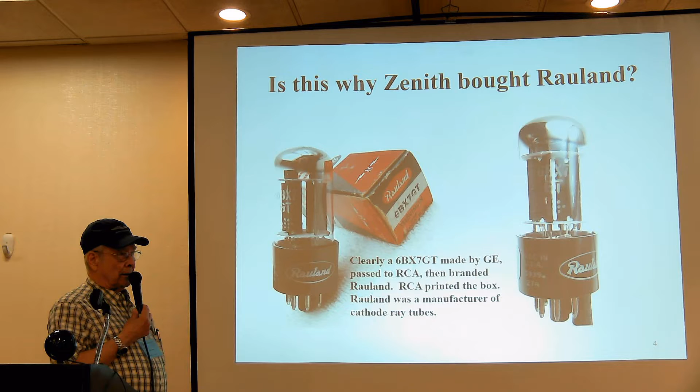So how all this comes down is very interesting, but Rauland was a producer of picture tubes, and I'm not sure they ever made a receiving vacuum tube, and it's very unusual to see a Rauland box tube. So anyway, go ahead. He said they were accused of doing that to prevent losing vacuum tube supply. He did not say in the write-up whether or not it was true. Go ahead, next one.

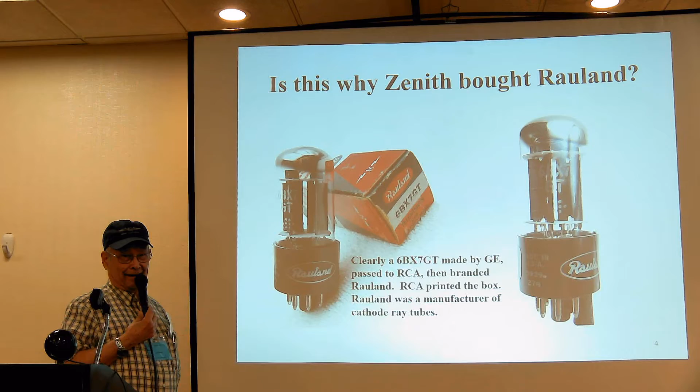So, RCA's lucrative patent licensing scheme was facing destruction. RCA and others provided technical support and advice on organization of the Japanese electronics industry in return for paying to license the RCA patents. So, Sarnoff established a technical center in Tokyo modeled after the Princeton RCA laboratories.

The Ministry of International Trade and Industry in Japan organized a consumer electronics industry plus financing of about 10 companies, and you will know Mitsubishi, Toshiba, Hitachi, all the ones you know. They organized an industry to manufacture vacuum tubes using the Keiretsu organizational structure common in Japan. And that's another story in itself. But then they used predatory dumping practices to sell this equipment into the United States. Go ahead to the next one.

The Japanese action initially was hardly noticed in the US. Nobody was paying any attention to what they were doing over there. And from 1958 to 1965, by selling at reduced prices in the US, they reduced the US radio industry to a shambles. In the 1960s, color TV was exploding. Zenith was leading in production and customer acceptance. And Japan attacked the US color TV market. And the Sony Trinitron and all of that stuff is part of that story.

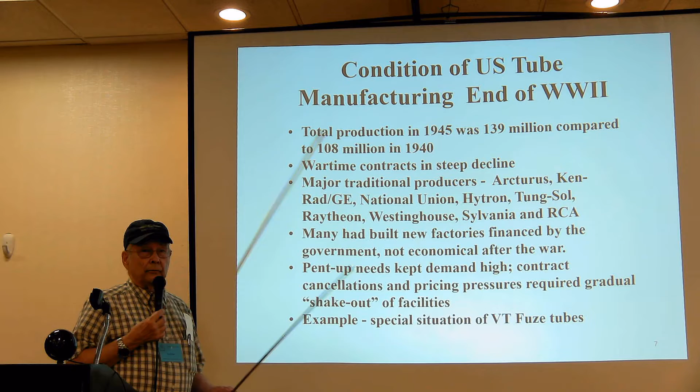Okay, so now I've gone through the first part. Now this was originally going to be about tubes. Now we'll talk about tubes and the manufacturing of them in the U.S. At the end of World War II, the total production in 1945 was 139 million tubes compared to 108 million in 1940. And the surprise of that is that you'd think World War II would have created more of a bump in that. But of course, the civilian demand went down and it was replaced by military.

After the war, of course, the wartime contracts went into steep decline. And these were the heydays, though, of the American telecommunications industry. Major traditional suppliers were Arcturus, Kenrad, GE, National Union, Hytron, Tung-Sol, Raytheon, Westinghouse, Sylvania, and RCA. And many had built new factories financed by the government, not economical after the war.

Lots of different industries in the U.S. went through that process where the company didn't have the money to build it, the government built it, or gave them the money to build it, or they leased it back to them to operate, and then after the war they would either buy it or sell it. So the pent-up demand after the war kept demand high. The contract cancellations and pricing pressures required a gradual shakeout of facilities.

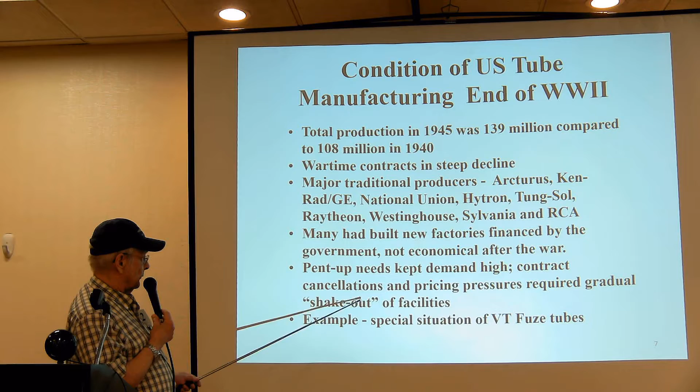An example of this is the special situation of the variable time fuse, which used the patented tubes developed by Sylvania and the Applied Physics Laboratory of Johns Hopkins. And everybody wonders why we don't see those tubes. When you fire a shell, the tube has got to last for 5 seconds. And those tubes had a maximum life of 5 hours. You could test them and see that they last that long. But this is not going to be a tube that's going to find wide recognition in the consumer electronics industry. Okay, next tube.

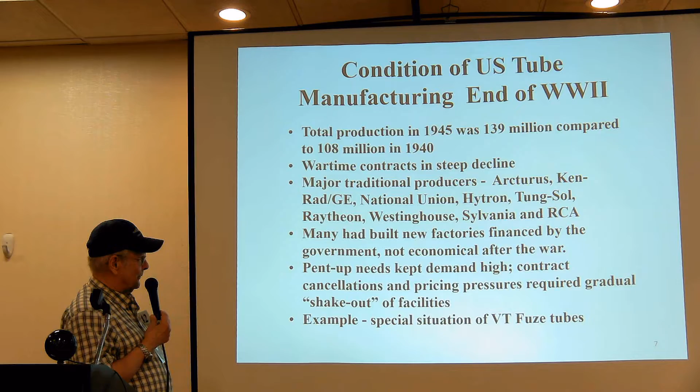Paul? Yes. Can you make sure your mic is turned on? I thought it was. Hello, 1, 2. Hold it closer. Sorry about that.

In 1974, Western Electric produced 1,200,000 tubes. And on December 31st, '83, by court order, the Bell system ceased to exist. That was an important milestone for me too, because I had gone to DC to the Telecommunications Association to work the divestiture from their perspective. The last manufacturing facility in Kansas City closed in 1988. The last tube produced was the magnificent 300B audio triode, and that is Bernie Major's quote. So I didn't say that, he did. But then he made them. Okay, next.

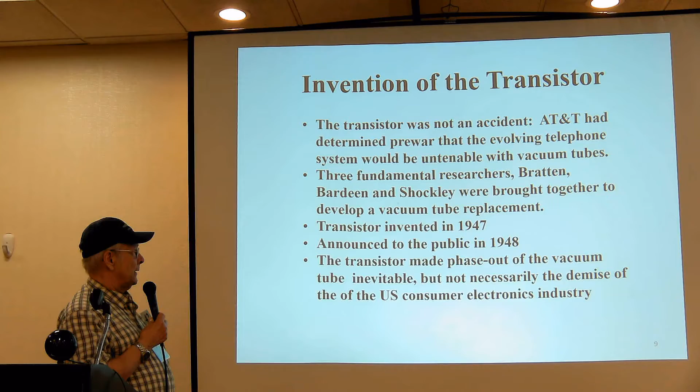These guys were all throughout Western Electric and Bell Labs during World War II, developing radar and detection systems and all that. The transistor was invented in 1947. It was announced to the public in '48. The transistor made the phase-out of the vacuum tube inevitable, but not necessarily the demise of the U.S. electronics industry. That might have happened anyway, but all the stuff that I was telling you about to start with triggered that into a real decline. Go ahead then, next one.

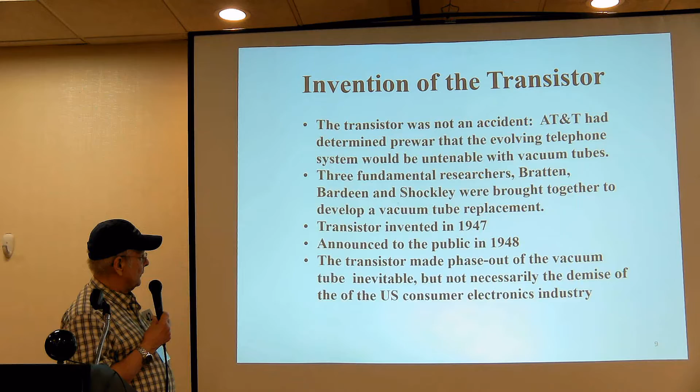And of course, by the time you get to '76 and '78, you're getting down to pretty small numbers. And I do not have any numbers past that. But these are pretty good, well-researched numbers. The researchers that got these were there during that time. Go ahead and do the next one.

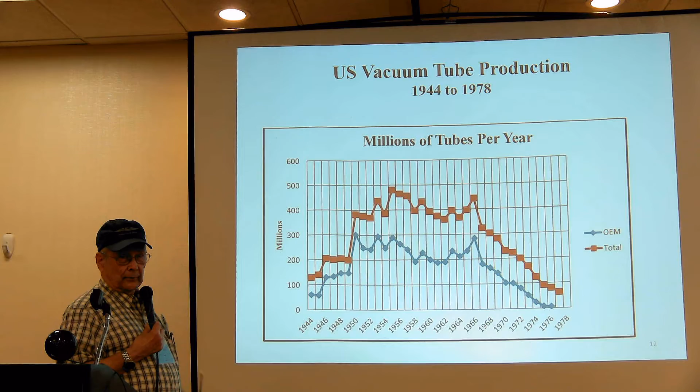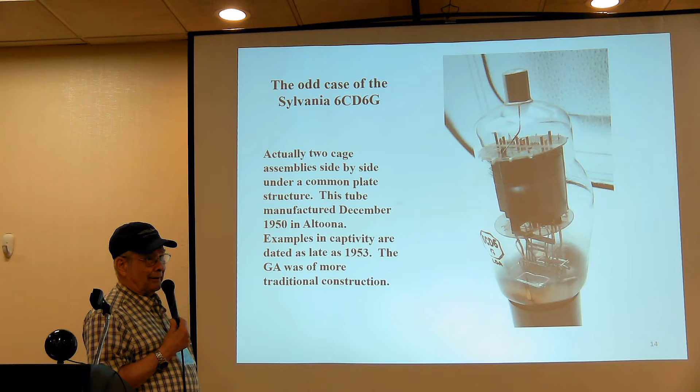This is a strange case of a 6CD6. This is a photograph that will give you an idea. It's actually two complete tubes, two cathodes, two sets of grids, all around one plate. Sylvania manufactured this thing from about 1950 to at least 1953. I've got a number of examples of this tube. I never realized it until I started sticking my nose in some of this stuff to do this. I had a bunch of these and didn't even realize it. Now, why they did it that way, I don't know, but that's just one of the curious things you find out in the evolution of the tube business. Go ahead.

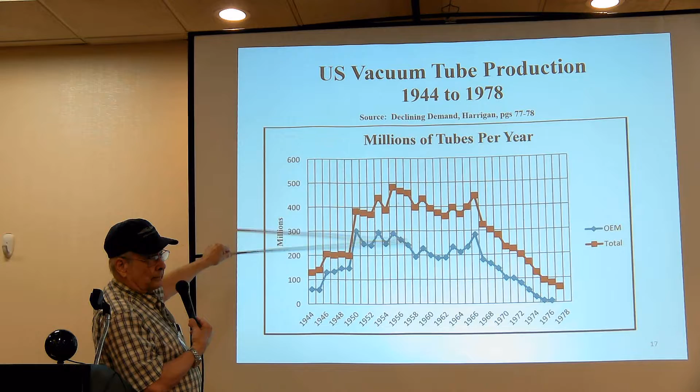Go ahead, next one. All right, now the manufacturers, after this, they could see the writing on the wall because already transistors were starting to make inroads. And I don't know how many of you guys were in engineering circles at the time. We'd sit around endlessly arguing about whether or not transistors would ever replace vacuum tubes. No, they're never going to be able to handle high power. No, they're never going to work at high frequency. And of course, we know where all that went.

1955 was the highest production year. By 1955, transistors had begun to be adopted where low power and reliability were essential, for issues where cost was not a major issue, and you know what all that means. Military and high reliability manufacturing stuff. Diverse views on when transistors would begin to replace tubes in consumer products. By 1966, solid state had not been commercialized as fast as many experts had expected.

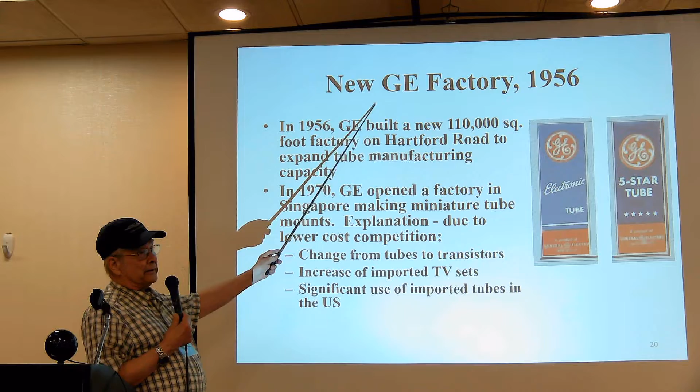GE built an entirely new factory in 1956, a 110,000 square foot factory on Hartford Road in Kentucky to expand tube manufacturing. In 1970, GE opened a factory in Singapore making miniature tube mounts.

The Japanese were already starting to make major inroads, and the GE explanation was change from tubes to transistors, increase of imported TV sets, because the imported TV sets came with Japanese tubes in them. They didn't buy them from US manufacturers, and significant use of imported tubes in the US, and everybody has seen the boxes and all that stuff.

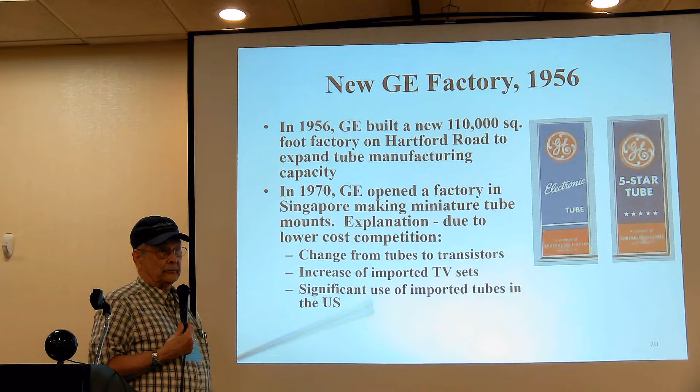Go ahead, next one. Sylvania positioned itself for long-term production of vacuum tubes. They built in 1958 a brand new manufacturing facility, and this was one of the reasons that GTE bought Sylvania, because Sylvania said, we are in this until the end, whenever that is. They never made runs of less than about 10,000 tubes at a time in this plant. Anyway, it was built as a commitment to efficient mass production.

The Emporium facility was their original facility, and they kept that for short run tubes and specials. And not only that, Emporium actually manufactured tube manufacturing equipment and sold it to other tube manufacturers. And that's not a very well-known thing. GTE acquired Sylvania in 1959, and the reason was basically that Sylvania didn't have enough money to build a new picture tube plant. But that's another whole story. So go ahead to the next slide.

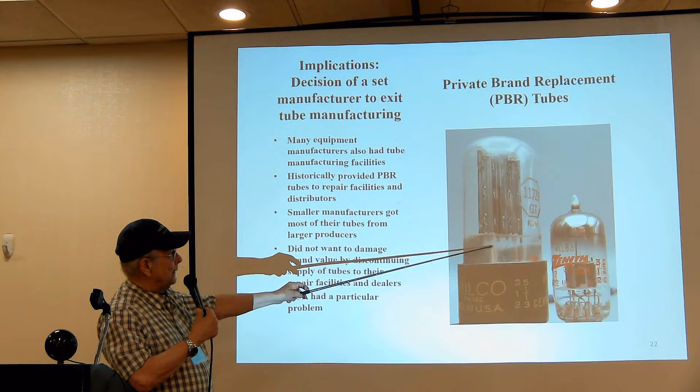Now, when you're in the manufacturing business and you make tubes and you make television sets, you've got a whole network of distributors and service stations. And if you sell a guy a television set and 2 years down the road it has a bad tube and it needs replacing and you can't give him the tube, you're in trouble. So this is a picture right out of the date code stuff. It's a perfect example of two tubes made by Sylvania, one branded Philco, one branded Zenith.

But these equipment manufacturers, when they went out of business making tubes, they had to have an alternate supply. They had to have the ability to put their brand name on tubes to keep the myth alive. Many of them had tube facilities. They had been doing this PBR, this private brand replacement tube business for a long time. And they didn't want to damage the value of their name by discontinuing the supply of tubes. RCA had a particular problem because they were making the Nuvistor and they were making 60 types of tubes that nobody else made.

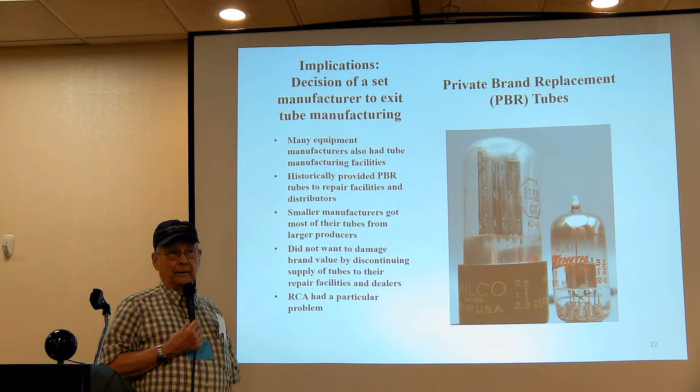And I don't know what some of those were, but there were 60 of them, and we'll talk about that in a little bit. Go ahead, next one. In 1961, GE closed Scranton, moved its assets to Owensboro, closed Anniston, Alabama, introduced the Compactron. RCA closed Indianapolis, Sylvania closed Mill Hall, Pennsylvania, and Shawnee, Oklahoma. Shawnee, Oklahoma had only been in business for 10 years.

CBS exited vacuum tube manufacturing as well as TV. Philco exited the tube and television manufacturing. Ford bought the Lansdale plant to build car radios. And I want to tell you, the last tube you'll see out of Lansdale was dated 1961. I can imagine when Ford saw that they were manufacturing tubes, they said, that's the end of that. Next one.

Raytheon quit in 1963. They consolidated receiving tube manufacture in Newton, Massachusetts. Shortly after, they divested their manufacturing business and sold the equipment in Europe. They contracted with Nippon Electric to provide fast-moving replacement tubes branded Raytheon. And there's the kind of boxes you've certainly seen.

Go ahead, next one. In 1966, only five major manufacturers remained: RCA, General Electric, GTE Sylvania, Westinghouse, and Amperex, that, by the way, had been bought by Philips in 1955. And that was not well known or publicized. Philips liked to do their stuff out of the limelight.

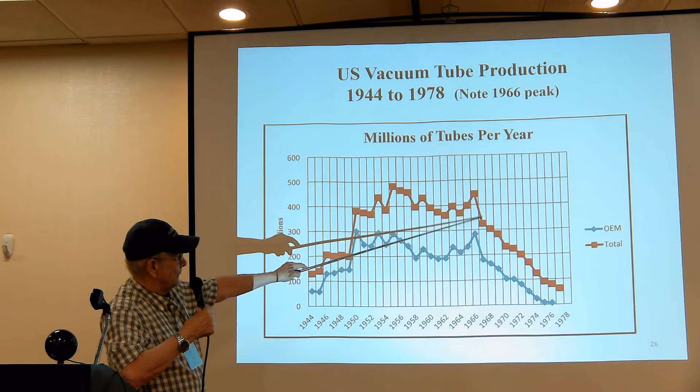Taiwan tube plant sold to Union Electric. I got one of the last Union Electric tubes made in a box that says Union Electric, and it's a POS, if you know what that means. And Taiwan tube plant was sold to GTE Sylvania in '75, and subsequently abandoned those assets once they found out what they had. It was on a barge, and they dumped it in the Pacific Ocean. Quite literally. Next slide.

Okay. This is the EIA, the Electronics Industries Association. By 1967, marketing of Japanese receiving tubes was in full force. EIA started litigation in the Treasury Department, and Japanese capacity was estimated at $200 million a year. The Treasury Department took no action to dismiss the EIA complaint in 1969. Next slide.

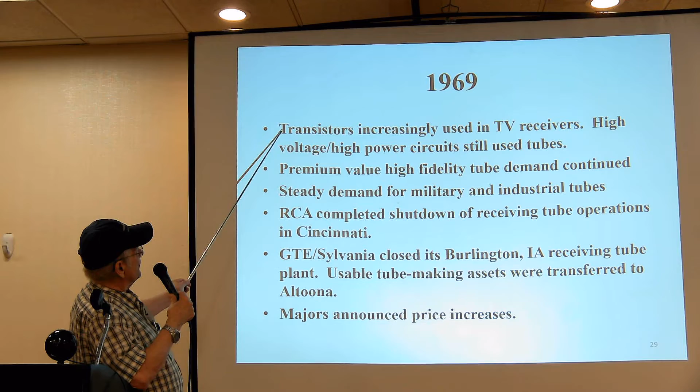Okay, '69, transistors are coming up. Premium value, high fidelity tube demand continued. Randy, that's you. Steady demand for military and industrial tubes. Reading the Altoona newspaper when the military would throw out a contract for 39,000 6X4s, it actually made the local newspaper because everybody had to go to work now for a while longer.

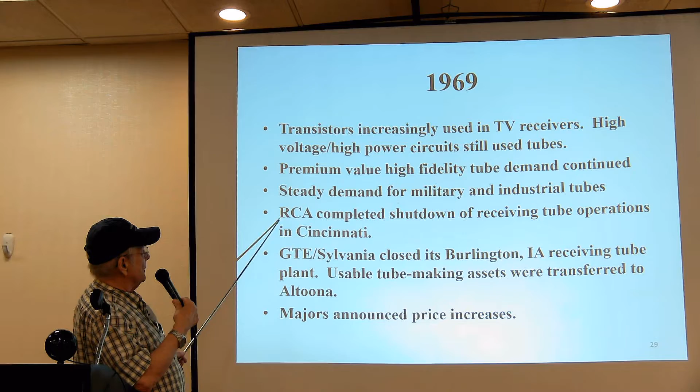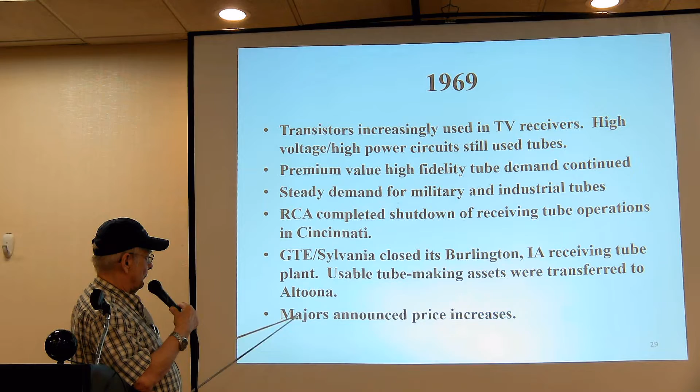RCA completed shutdown of Cincinnati. GTE Sylvania closed its Burlington, Iowa receiving tube plant. Usable tube making assets were transferred to Altoona. Majors announced price increases. Next slide.

1970, RCA closed Woodbridge, New Jersey, and Cowansville, Quebec receiving tube plants. Only the old Harrison, New Jersey plant remained operating. The plant had not been upgraded. Its operation required extensive hand assembly procedures, and they were way behind Sylvania and GE in the ability to make tubes economically.

In 1973, a niche market shortage developed in Japan due to shortages of audio tubes. That's an interesting comment. And of course, the microprocessor in 1974. Last hybrid TV receiver was sold in 1974. 1974, GE closed the Tell City, Indiana plant, which had been a World War II branch factory, mothballed the Hartford Road plant. Instead of divesting themselves of it, they mothballed it so they didn't have to write it off right away. Go ahead, next.

Amperex in '75 had been acquired by Philips. You see all of these various Amperex labeled tubes, some made in England, some made in Heerlen in the Netherlands, some made in the US. They continued a lot of that. They had 3 locations: Hicksville, Long Island, Slatersville, Rhode Island, Cranston, Rhode Island. Anyway, it was obvious they were transitioning to the manufacture of solid state. It's likely, and this I'm not sure of, but I believe that they closed the Hicksville plant when they stopped making tubes in the US. Go ahead.

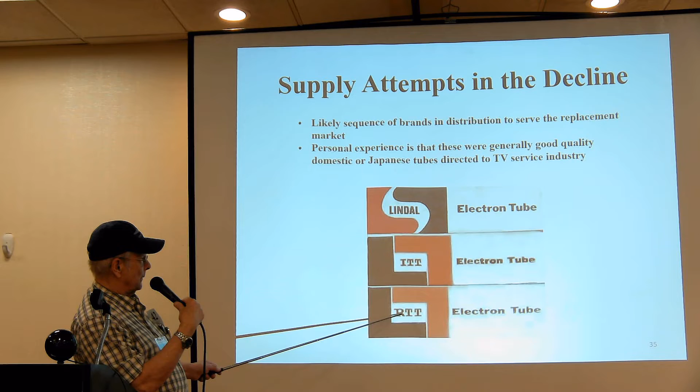Supply attempts in the decline. You've seen these boxes too. It was started, as far as I know, by ITT as a resale. And most of these tubes are either high quality Japanese or American tubes. And then Lindal. The distributor in Patuxent that I am aware of claims to have seen and distributed some of the tubes labeled in RTT boxes, but I've never seen one. And so you get tube caddies full of these things. Go ahead, next one.

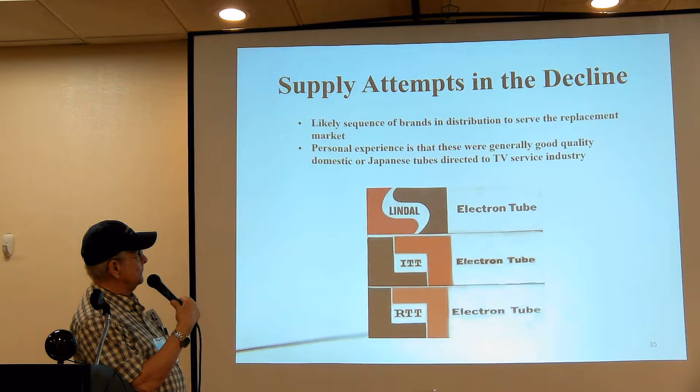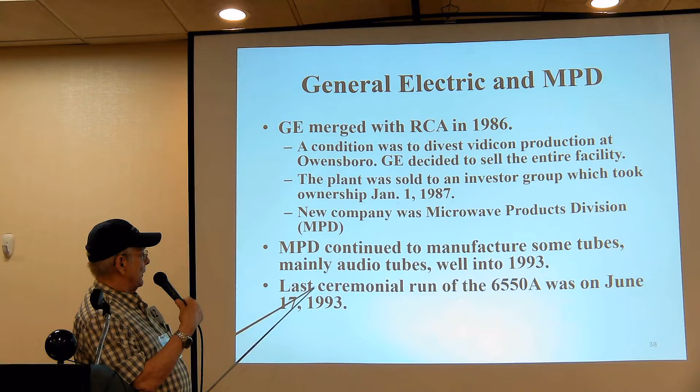Go ahead, next one. General Electric and MPD. GE merged with RCA in '86. A condition was to divest the Vidicon production at Owensboro. GE decided to get rid of this whole place and sold it to an investor group which took ownership January 1st, 1987. The new company was Microwave Products Division, even though it was a corporation on its own. MPD continued to manufacture some tubes, mainly audio tubes, well into 1993. The last ceremonial run of the 6550A was on June 17th, 1993.

This is the end of tube manufacture in the United States and basically the end of my presentation. The point is that there is a tube company in business in northern Georgia that's named Western Electric. And they recently sent out a list of, they said, what tubes would you like us to make? And of course I said, you ought to figure out how to make a Russian KT-120. That is a real tube.

So in the meantime, the Russians have gotten to the point where they are making tubes that in many ways are as good as any tubes we ever made in the United States. And I've had some firsthand experience retubing amplifiers with KT-120s. It is a fantastic tube. It's one of those that just seems to be just right. And so it'll be interesting. They want to do the 300B triode, and we'll see how well that works.